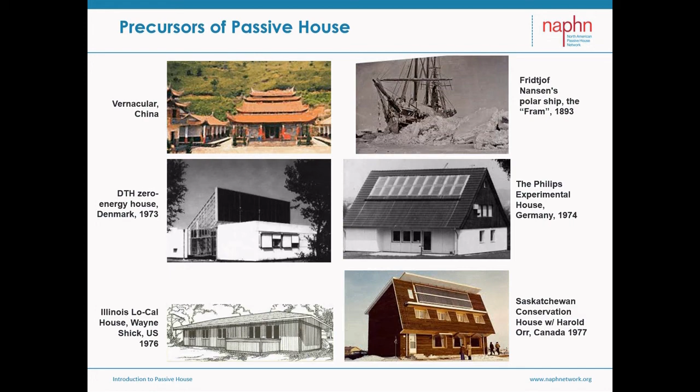So, the first Passivhaus was built in 1990 as a research project, a physics experiment in Darmstadt, Germany, by an international team led by Dr. Wolfgang Feist, the founder of the Passivhaus Institute, and included Bo Adamson and many others. It was and is composed of 4 attached row houses, complete with custom building components developed for the experiment. And this research solidified the underlying principles and strategies that would become the Passivhaus Standard.

The story goes that Amory Lovins visited the building and provided the insight that these new developments could be standardized and scaled to great effect on the building industry. And from that time, the Passivhaus Institute has continuously conducted research and developed tools, working with industry and government partners worldwide to make Passivhaus buildings the new normal.

So what changed? What was the discovery of this Passivhaus experiment? What flipped in our thinking? What came out of this research was the essential power of the Passivhaus concept, that despite our focus on energy efficiency and seeing comfort and health as a result of efficiency as side benefits, it is instead the focus on occupant comfort and health that drives performance. It starts with the occupant.

Per the purely functional, shall we say Platonic or idealized definition as it was distilled, we quote, "A Passivhaus is a building for which thermal comfort can be achieved solely by post-heating or post-cooling of the fresh air mass, which is required to achieve sufficient indoor air quality conditions without the need for additional recirculation of air." This describes maintaining comfort and health with 100% fresh air with a very low capacity for heating and cooling energy.

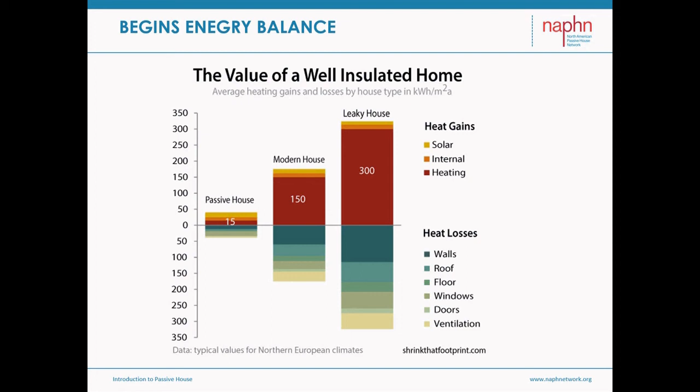This dramatic reduction in heating and cooling demand demonstrates the power of the optimized passive architectural structure and will flip our expectations. It's a flip that we've experienced with our computer industry, where computers get ever more powerful while using much less energy. And so too, Passive House decouples power from performance. Passive House provides a clear pathway to decouple and frees us to deliver zero carbon buildings today. This is game changing. Let's look at what Passive House delivers.

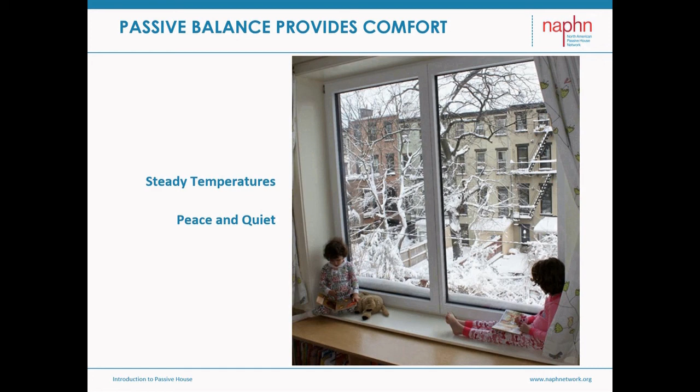The Passive House concept starts with the occupant, as we've said, and moves outward. What makes us comfortable? Well, how about steady temperatures? No drafts, no cold feet, peace and quiet. How about sitting by the window on a cold winter day and feeling comfortable?

Passive House provides hygienic indoor air quality, 100% fresh air and exhaust with no recirculation. It's filtered fresh air, keeping pollution out. No mold and associated illnesses, reduced asthma and allergies.

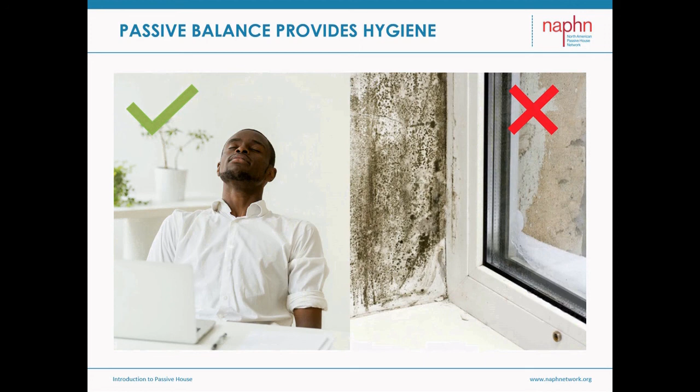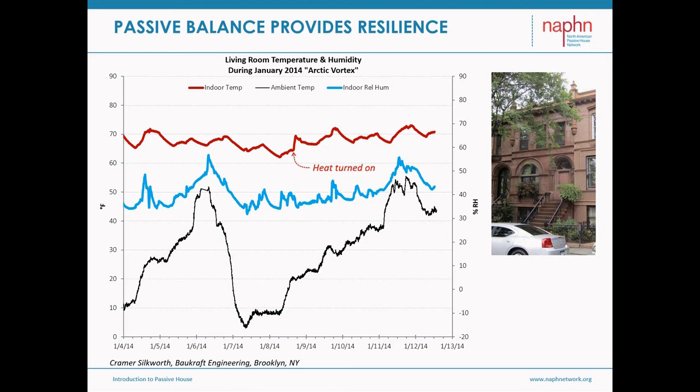Passive House supports equity by delivering high quality, comfortable, and healthy homes that cost dramatically less to operate. The dramatic reduction in energy usage also protects people from possible future energy price shocks.

Passive House supports our country's transition to a green grid and electrified future. The dramatic energy reduction of Passive House makes removing fossil fuels from buildings economical. And with renewable energy options available on-site and off-site, Passive House makes grid utilization more efficient and resilient.

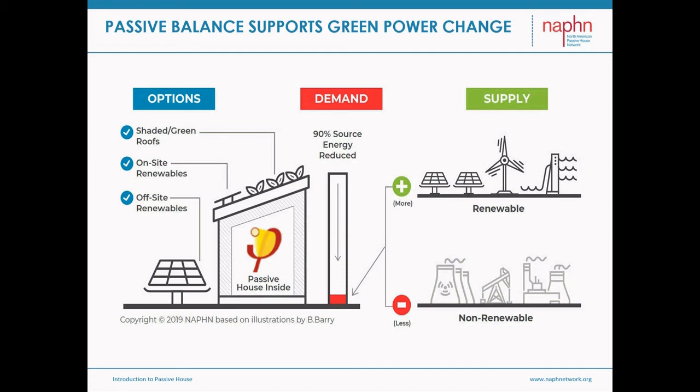Consequently, the more passive houses we build, less renewable production is ultimately needed, making our green transition more affordable and quickly achievable. To achieve these results, Passive House doesn't look to more power first to solve problems. Instead, as designers and builders, we re-engage the passive building elements, the architecture, the structure itself, and empower it to do the heavy lifting.

As you would first place the fulcrum of a lever in the optimal position to lift a weight before applying power to actually lift it, in our case, the enclosure is the fulcrum. And how we formulate the enclosure, like the placement of the fulcrum, has an equally profound effect on the power needed to provide comfort and health. This flips our business as usual thinking.

Passive House asks us to question everything, to effectively restart, like going back to the ancients, going back to school. How do we optimize and empower the passive building elements to do this heavy lifting? And this goal, this quest of unlocking the power of the passive building structure re-engages our focus with the ingredients, the recipes, the materials, the details, and the craft of building.

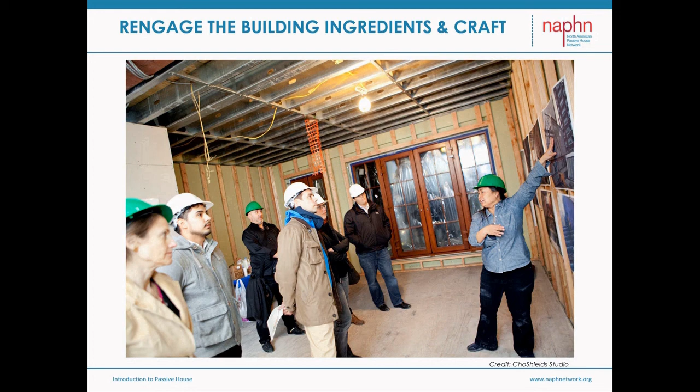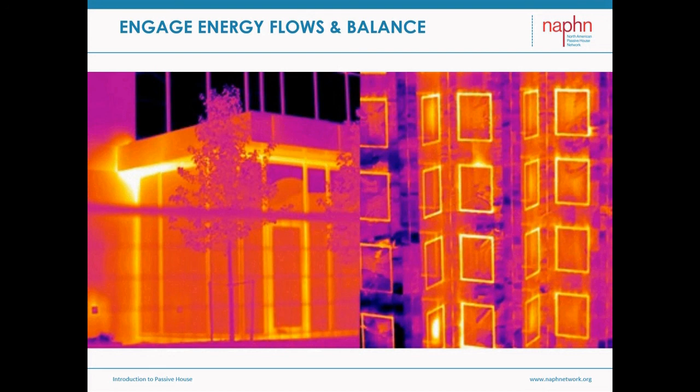It empowers and energizes the project team, from the owners to the designers to engineers, architects, builders, construction site laborers alike. Nothing is taken for granted. And this quest for passive building power has us designing and building with the energy flows and the energy balance, not as far off abstract concepts, but instead as active tools that inform everyone's work.

The question becomes, do we have the imagination? Do you have the imagination it takes? Don't be deceived by what you may or may not think is possible. Passive House is just starting, and like the stone master builders of medieval times, who could have imagined that working in stone, they could develop the flying buttress? They could effectively dematerialize the walls. It was an astonishing transformation, perhaps unimaginable.

Today, Passive House is evolving rapidly. So let's move the frame of reference. Let's look at towers and shake our preconceptions about what is a Passive House building and what might be possible.

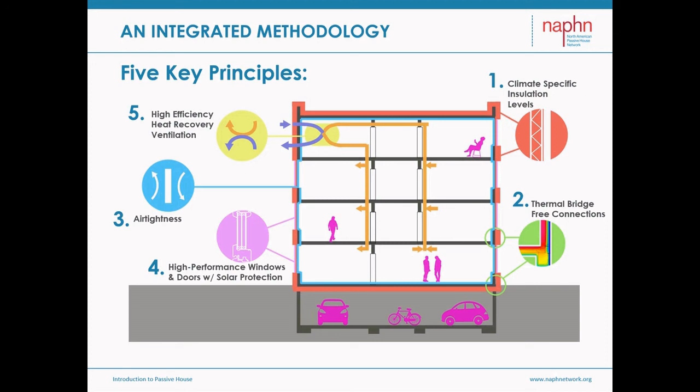These key areas and more are all entered into the Passive House Planning Package or PHPP energy model. The PHPP is an Excel-based tool which allows the designer to simulate the behavior of the building both during peak times, winter and summer, and over the entire year. This flexible, easy-to-use model allows for quick iteration and design alternate evaluation.

The PHPP and all other simulations should be implemented not just as compliance tools, demonstrating that the building meets the standard, but as design tools, which allow the team to iterate and evaluate a host of ideas and options, real-world assumptions, and possible future scenarios. This doesn't mean that the PHPP controls the design, but rather that it helps to inform the design with performance data throughout the process. This is the essence of data-driven design, of good design.

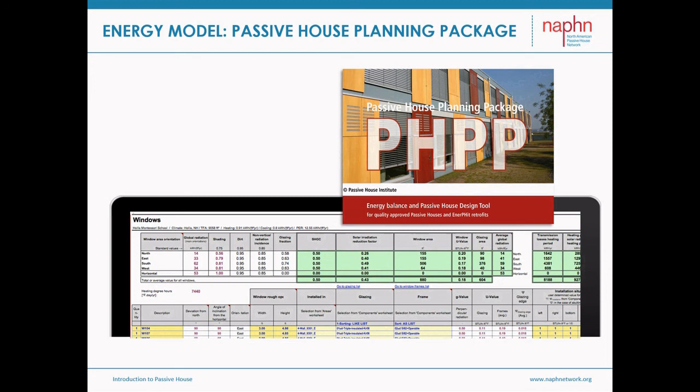With that, let's take a closer look at the basic principles, starting with the first, right-sized continuous insulation. Generally, this means more insulation than normal, but not always. The idea is that you want to insulate to where you don't just shiver less, but you are actually comfortable. Typical buildings are a lot like an underdressed teenager wearing nothing but a hoodie in midwinter. They'll survive, but do we really want to live like that?

You know that if you wear the right layers and a good parka and a hat and so on, you can not just get by in the cold, but actually be warm and comfortable. Our passive house is the same way. Or think of it as temperature-rated sleeping bags, all surrounding the conditioned space.

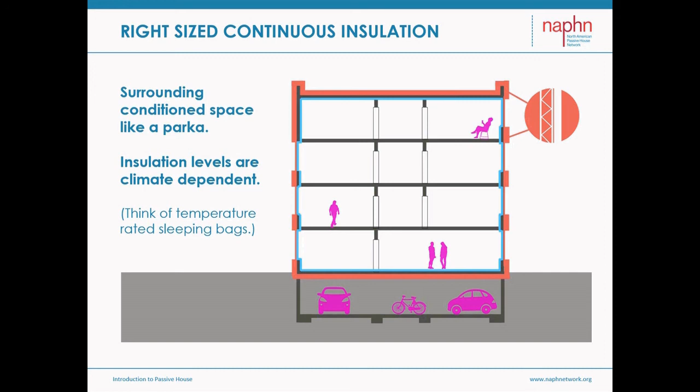Principle number 2 then extends this thinking to make sure we don't have breaks in the insulation. In construction, thermal bridges may not seem important in isolation, but they can completely undermine the building's performance. If we think of a thermal bridge as a cut, your project can easily die from 1,000 thermal bridge cuts if you're not very careful.

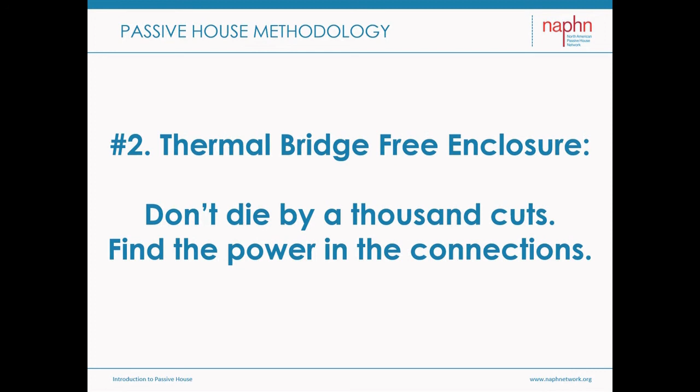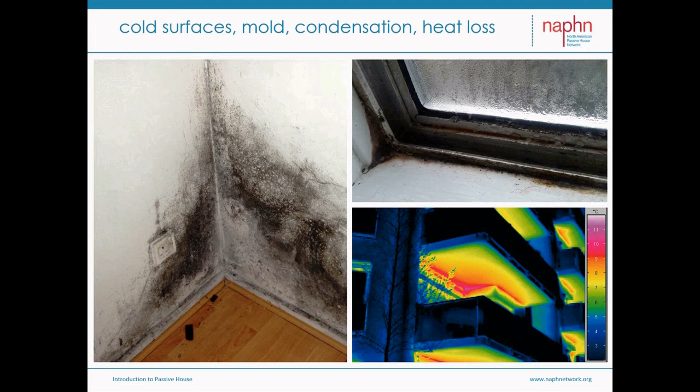Examples of thermal bridges abound. The thermal image on the lower right shows the common balcony connection turning a building into a radiator to the world. 1,000 cuts. The colder interior surfaces can cause condensation, as we see on the window frame at the upper right, and mold on the left. To overcome them, typically we overheat, treating the symptom with brute force. With Passive House, we avoid the problem in the first place.

Thermal bridges typically occur at junctures where the floor meets the wall or wall meets the roof, or at window frames meeting walls or balcony connections. The energy losses cause thermal discomfort and condensation and moisture damage. Traditional energy models don't account for thermal bridges, and this is a big contributor to the oversizing of mechanical systems, just to be safe.

In Passive House, we look carefully at all these connections and junctures, work through the construction details, and eliminate the thermal bridges entirely or minimize and calculate them. We include them in our PHPP energy model. This results in increased predictability and produces lower risk construction.

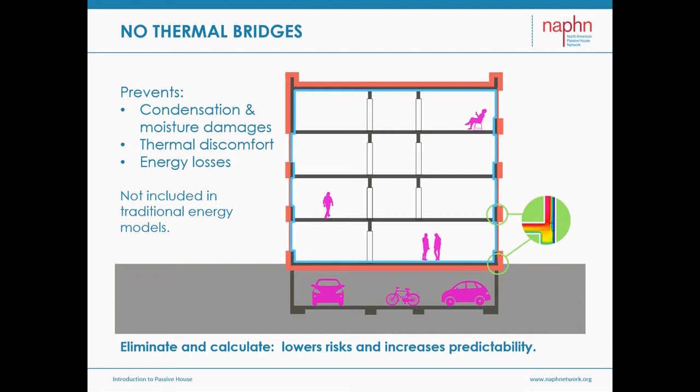Principle number 3 is an airtight enclosure. And while when the subject comes up, people might reflexively touch their necks and worry about poor indoor air quality and perhaps succumb to nightmarish imaginings of not being able to open windows, we need to set the record straight from the start. 2 concepts are in play: quality indoor air and our freedom. And so we need to flip the common and wrong-headed thinking on both.

First, let's address quality. The fundamental idea at work here is that it is very difficult to control the quality of something if you don't actually first have control of the thing itself. If the enclosure is leaky, the polluted outdoor air is moving willy-nilly through the building. Consequently, the only way to have any sense of control is to overcome it with power, never sure if this space or that space is properly ventilated. Like thermal bridges, we're treating the symptoms with more brute force. But in an airtight environment, the air is under control, and we can very efficiently and confidently maintain its quality. Airtightness sets the table for healthy indoor environments.

But you say, that's all well and good, but the Passive House police won't let me open the windows. It's fascism. Quite the opposite. Of course, there are no Passive House police. You can open the windows. But let's think about it for a second. You often open the windows when the indoor environment feels unhealthy and uncomfortable, and you feel the need for the fresh air. It's not a want, it's a need.

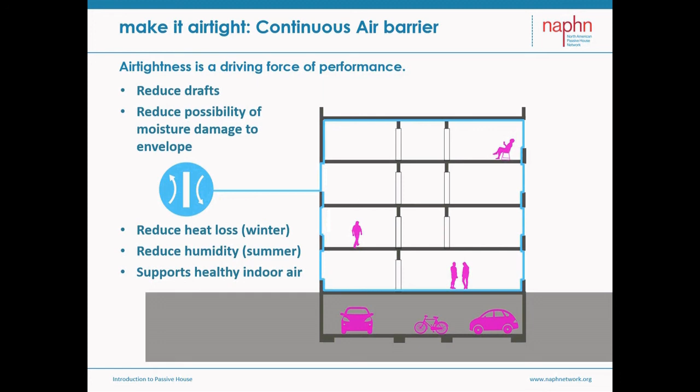And in hot, humid conditions, airtightness keeps the humidity out and reduces the demand for dehumidification, allowing the cooling system to be sized mostly for cooling, as it should be. For all these reasons, the truth is that buildings can never be too airtight, and Passive House takes full advantage of this truth.

Number 4, high-performance windows and doors with solar protection. The flip here, of course, as we spoke in the beginning, is to rid ourselves of the unfortunate association people make with past passive solar buildings. And we must always be on guard to avoid overglazing and the accompanying overheating. The passive solar buildings of the 1970s and onward were overglazed, out of balance, and often uncomfortable.

If you recall, the precursors to Passive House in the 1970s were not passive solar buildings. They tended to be super insulated buildings that balanced daylighting needs and solar heat gains and losses. Passive house buildings don't have tiny windows either. We're not building caves. Expansive views abound. We will utilize passive solar heat gains, but we are being very conscious about the energy balance, about solar protection and the consequences. Restraint may be a good word for what we're showing off.

A key concept here is that the windows and doors act not simply as a provider of views and daylight, but they are a critical component in our continuous insulation and airtightness. The windows themselves are often triple pane and truly thermally broken and airtight with 3 layers of gasketing. And the window connections to the surrounding construction and airtight and insulation control layers must be airtight and insulated. Thermal bridge free connections, of course. This all gets you deep into the construction details.

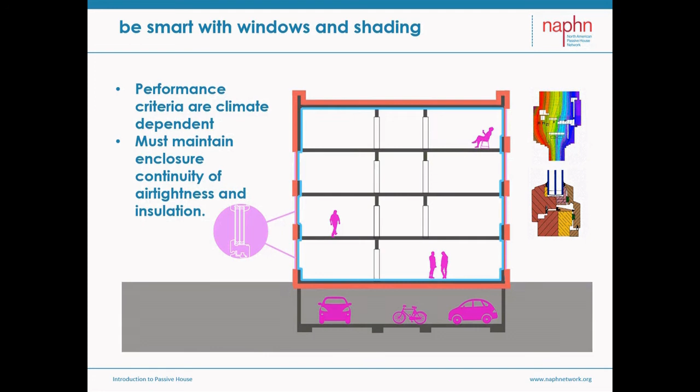Passive House windows can come in any type: metal, wood, metal clad wood, PVC, and fiberglass. There are dozens of suppliers to the US market today, and there are several North American manufacturers producing Passive House certified units. Be sure to check out the certified component database on the PHI website, passivehouse.com.

Window quality is a primary driver of comfort, and while there are a myriad of factors, the fundamental idea here is that our typical windows result in significant temperature asymmetry. In winter, the window is colder than the other surfaces and you feel it. It causes convective currents, and this needs to be overcome with perimeter mechanical systems. With Passive House, the windows are of a quality that their temperature is close enough to avoid discomfort and avoid the need for mechanical systems to compensate. Because the windows are such a critical component and their performance cannot be compromised, we recommend that Passive House Institute certified windows are utilized.

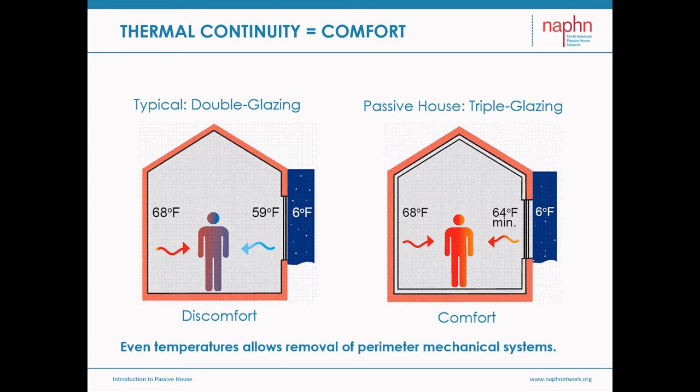And while windows provide our views and daylight and, yes, useful passive heat gains, improperly designed windows can cause significant overheating, causing discomfort and additional air conditioning requirements. And we know that overheating is a common problem in conventional buildings across industry today. The best approach to avoiding overheating is to carefully provide proper shading. Shading can be provided by how the window sits in the wall, by an architectural element, or landscaping. Needed shading can be achieved with interior blinds as well, but exterior shading is the most effective. Shading cannot be an afterthought. It cannot be optional.

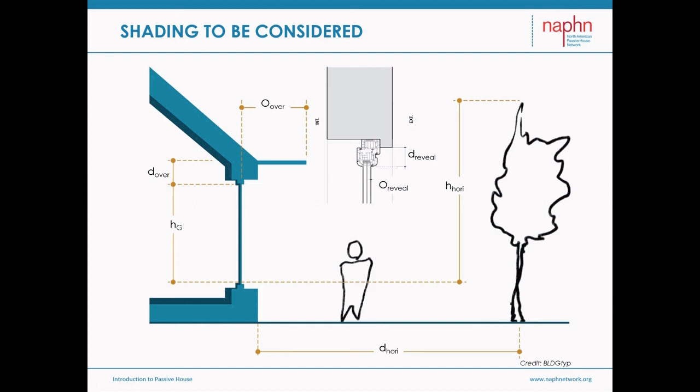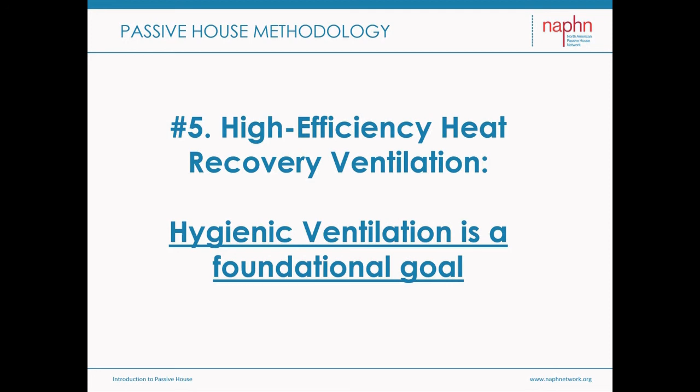Number 5, high-efficiency heat recovery ventilation. Let's recall back to the original definition of Passive House. A primary goal was to ensure effective hygienic ventilation. Today, in coping with the COVID-19 pandemic, hygienic ventilation is a hot topic. Add to that the inescapable forest fire smoke, and the long history of poor health outcomes for marginalized communities on the fence line of industrial production, and of course, hygienic ventilation should be a foundational goal.

And remember also that what is going to set us up here for success is the airtight enclosure. There is no pollution entering willy-nilly as happens in typical construction. We have control of the interior air. Now, typical buildings have ventilation systems, just bad ones, often providing only intermittent exhaust from bathrooms and kitchens, and don't ensure good ventilation everywhere. And in commercial buildings it often includes a lot of recirculated air.

In Passive House buildings, we supply 100% fresh air to every served space: bedrooms, living rooms, offices, classrooms, and 100% exhaust from every service area: the bathrooms, kitchens, utility areas, hallways, all operating continuously 24/7. The systems are laid out to ensure that all spaces have robust ventilation. Again, zero recirculation. Now, such a system of 100% air changes would normally be prohibitively expensive to operate because typically you need to heat or cool that fresh air to maintain comfortable interior conditions.

But this gives us the passive in ventilation because there is a passive heat exchange element, a core, located with the fan unit that allows the heat and energy from the outgoing airstream to move to the incoming airstream. And today, the efficiency of this passive exchange can exceed 90%. This means that on a cold winter day, the fresh air supply, without any added heat, enters the room within just a few degrees of the room temperature, ensuring occupant comfort. And Passivhaus Institute certified ventilation units ensure that you get the performance and cost savings you expect.

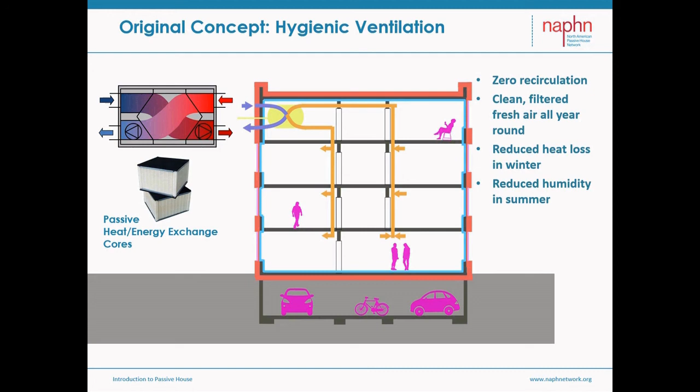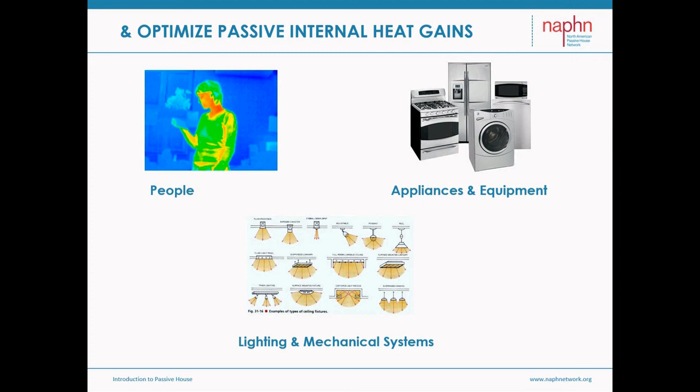In looking at the energy balance of the building and the building design, we are also going to look at things that provide internal passive heat gains as well: the people, appliances, and equipment, the lighting and mechanical systems, because they can contribute significantly to providing the heat needed in winter. It all goes into the PHPP energy model. So at this point in moving through the building design, the metaphorical fulcrum is pushed as far as it can go. The architecture and other passive elements are doing the heavy lifting, but still, there will likely be a need for active heating, cooling, and maybe even dehumidification, depending on where you are.

It's important to remember that this is about optimization, not magic tricks. So what we see is the ability to meet the occupant needs with about a 75% reduction in mechanical equipment sizing and up to a 90% reduction in usage. We can pull the distribution to the core of the building, and because the loads are so low, electrifying everything is much more economical. We can get rid of hydronic heating if we like and provide heating and cooling from a single heat pump system.

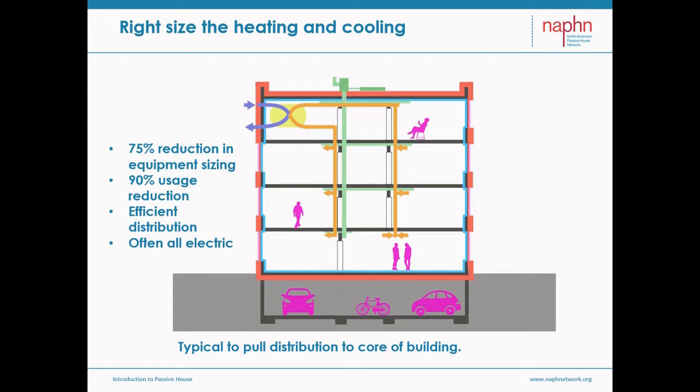The only trick here is perhaps getting the mechanical engineer to agree with the plan, because at first glance, they might see a building that will fail. I mean, how could it not with such a small mechanical system? It can take a few meetings, but with careful explanations, even engineers who have been initially energetically opposed can become ardent supporters. We need all you engineers out there on board. We can't do this without you.

And then there are smart systems. Passivhaus isn't opposed to incorporating smart systems and technology. Even the first passive house had a CO2 detector to help control proper ventilation. But the smart systems should enhance high performance. They should not be used to compensate for poor performance.

So let's make the architecture do the work. Let's incorporate only the most efficient equipment, and let's add smart systems as we like, but always with an eye toward greater simplicity. Let's simplify, simplify, and simplify. Our resilience depends on it.